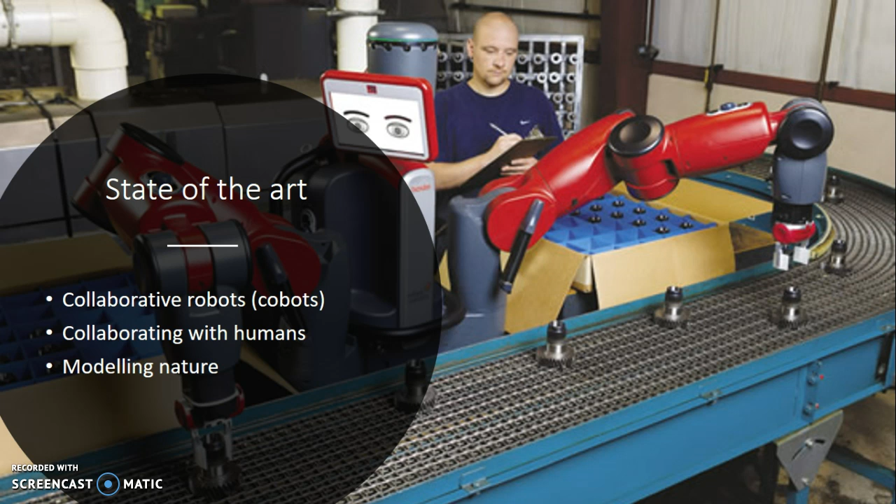One of the very remarkable aspects of robots in manufacturing is collaboration. The state of the art in this field is cobots. These are robots that collaborate with humans working alongside them to produce efficient results. Robots can collaborate and learn from humans to perfect the task they are working on.

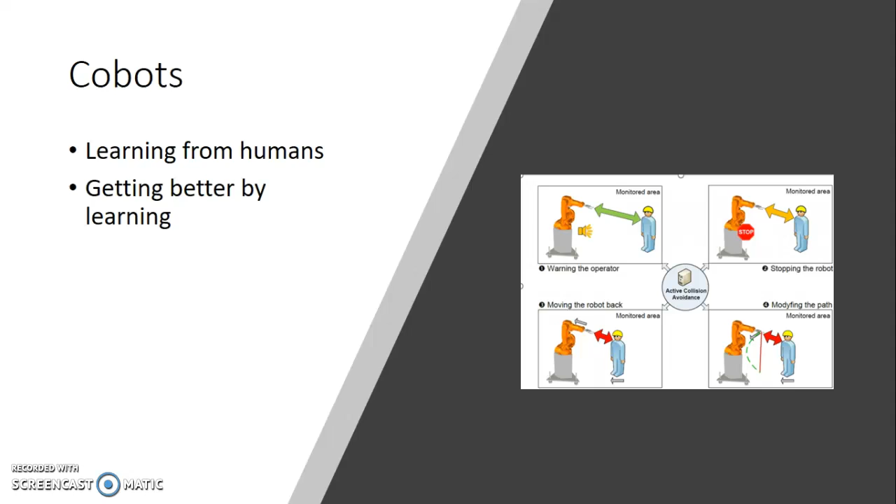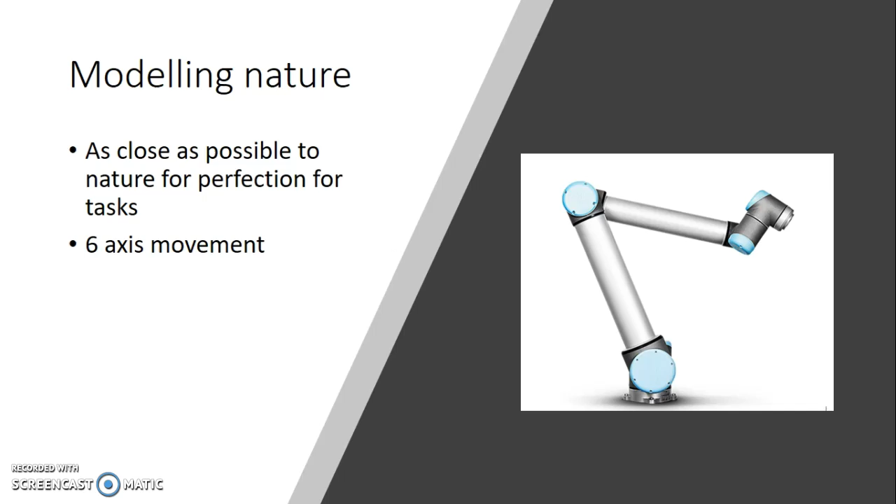Another aspect of the state of the art is modeling nature. Cobots are bots that collaborate with humans and they get better. As for modeling nature, these robots can get even better and more perfected in their way to assist humans through their rotation and six-axis movement. The future of the field holds many different aspects. There is 3D vision, auto calibration, and entire factory collaboration.

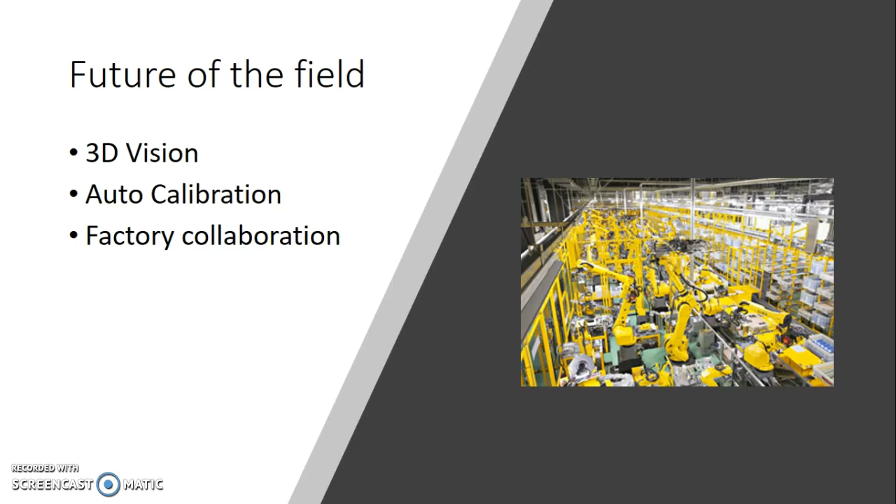Another application of robotics in manufacturing is the use of robots in lean manufacturing. Lean manufacturing is defined as a systematic method that minimizes the amount of waste during production without sacrificing productivity. The lean concept is relatively new, as it was first introduced in Japan shortly after the Second World War.

The concept builds on a 5-step foundation, often dubbed the 5 S's, in which the steps are sort, set in order, shine, standardize, and sustain. These steps pave the way for the quality, delivery times, and cost of a product, as shown by the lean manufacturing house to the right. When done correctly, the lean manufacturing process satisfies a customer's needs while using less resources.

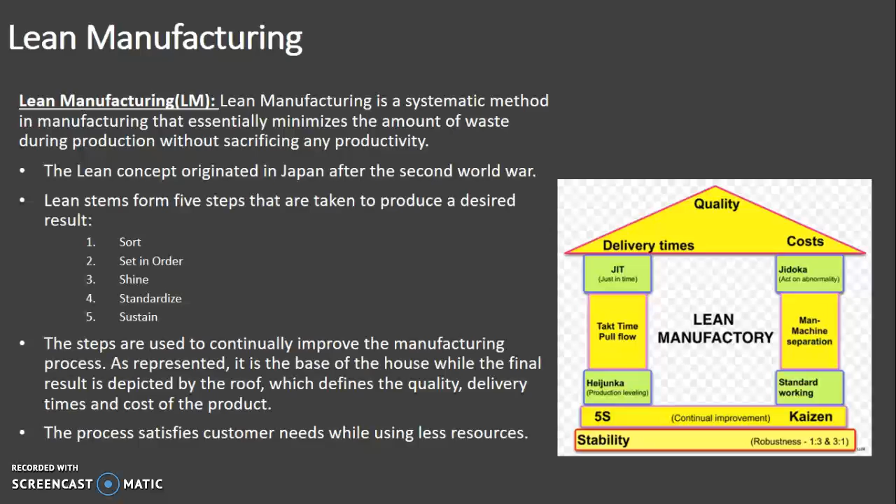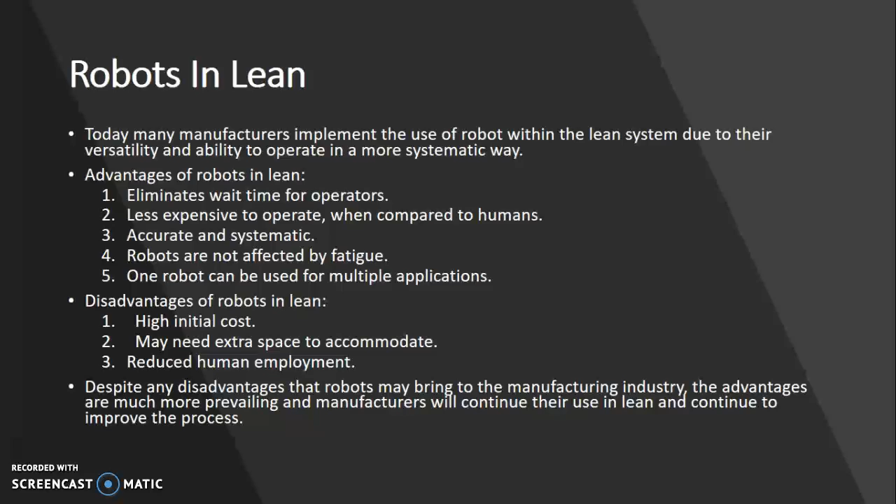When it comes to the use of robots in lean manufacturing, many manufacturers are adopting their versatility and ability to operate in a more systematic manner. Robots, being relatively new to the manufacturing world, produce both advantages and disadvantages. The advantages of robots in lean are as shown, which all play a part in improving the manufacturing process. The disadvantages are also shown, with the biggest being a reduction in human employment. Although robots can carry some disadvantages to lean manufacturing, the advantages they provide heavily outweigh the disadvantages.

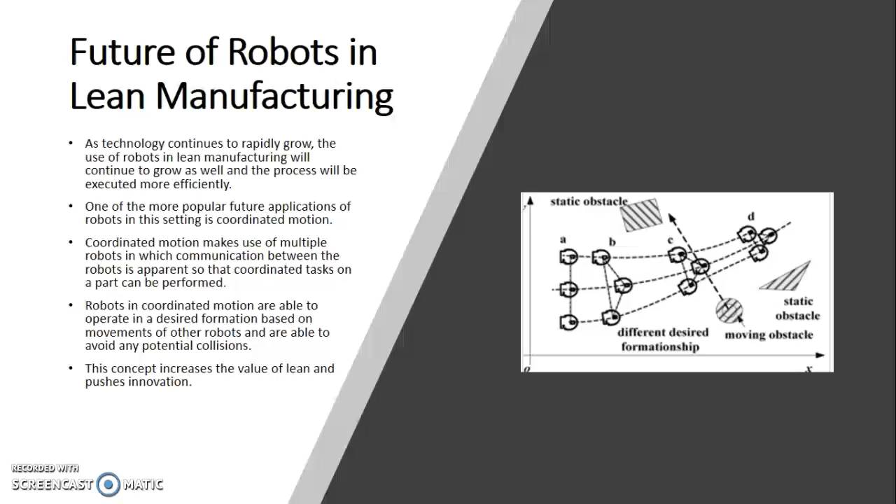The future of robots in lean manufacturing is very promising. As technology improves, so will the different processes in manufacturing. One of the more promising applications is coordinated motion, which makes use of multiple robots and communication between them to coordinate a certain task. These robots in coordinated motion are able to operate in a desired formation and avoid any potential collisions. Coordinated motion, when more practiced, will provide a better lean manufacturing process.

Currently, the only thing holding us back from making major jumps in robotics is our AI and programming. Currently, our machines can't actually function without these programs. So right now, robots in factories are either controlled using code or machine intelligence. I'll explain more on that later.

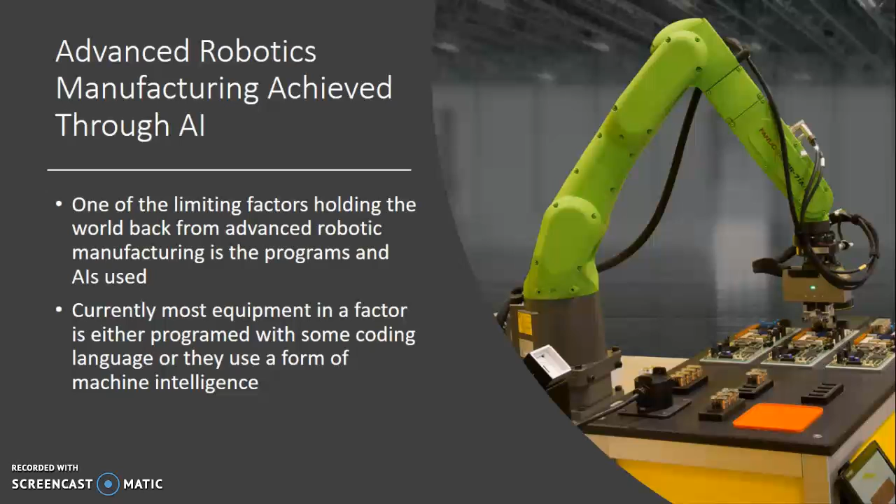So there are 2 types of AIs: the first is machine intelligence, and the other is natural intelligence. Machine intelligence uses a database full of information or photos that is used to identify what the sensors are looking at. Because of this stored information, it can be used to identify defects that even human eyes can't detect. It is also used for various situations with welding and soldering.

Also, if the database is given enough information, it can begin to mimic human intelligence. However, this is currently the best AI technology available and still needs more development to achieve perfection. As for natural intelligence, this is essentially human intelligence for software. Currently, there's nothing like it on the market.

There's no software that's available, and once this technology is developed, it'll be able to run whole factories, from the machines to balancing books to manufacturing and shipping and delivery.

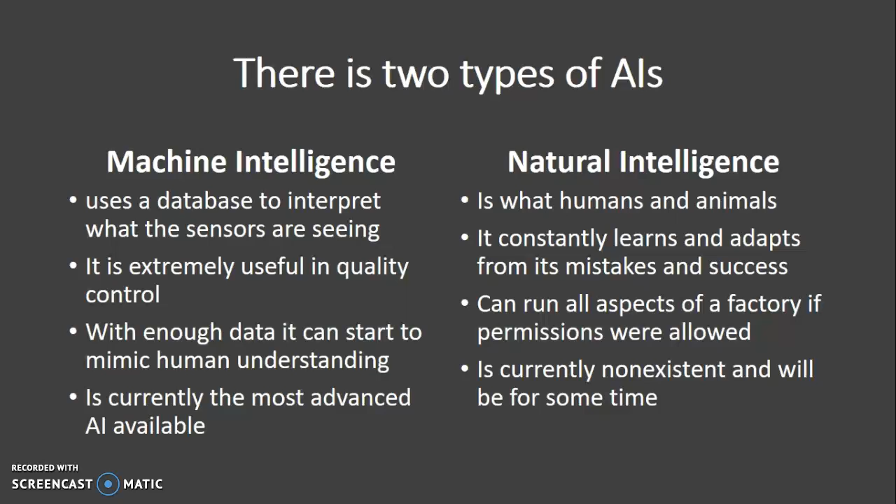Currently, on the state of the art in robotic manufacturing, in most factories we're using arm bots. They're either programmed with basic code or with machine intelligence. There's also CNC machines, which are programmed with G codes or other forms of programming. Additionally, some manufacturers use machine intelligence AIs for quality control and a list of other small actions.

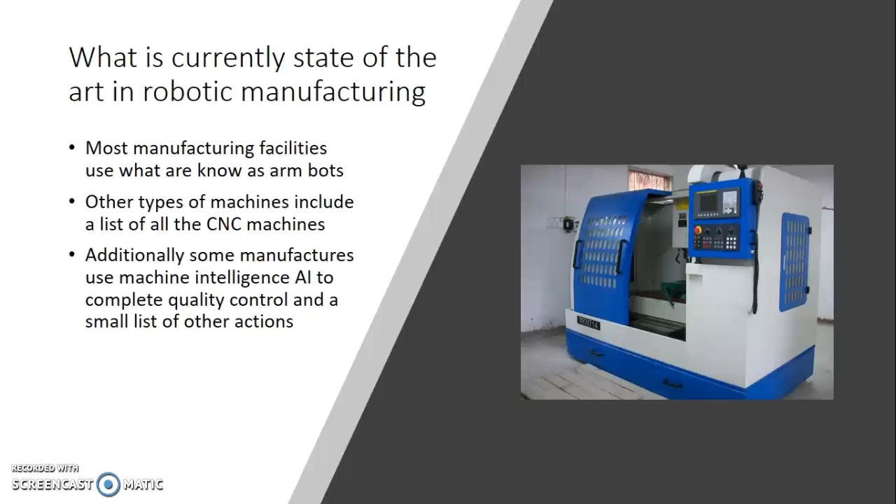So, the future of robotics and manufacturing. The future for robotics and manufacturing is very hard to tell, especially 5 to 10 years down the road, as the major thing holding us back is AI technology. So what the group determined...

The future would look like for robotics manufacturing would be multi-arm robots that can work on parts without moving from place to place in a factory, keeping parts stationary and reducing time between delivery. AI should also be able to assist further in nanotechnology, as it'll be able to do finer detail, as well as developing biomedical apparatuses, as these need to be precisely made.

Additionally, AI should be able to run factories without human interaction, and that's basically all that AI can do for us. Machines have to become better, and AI needs to become better, programming needs to become better in order for this to move forward. But the major thing is AI performance.